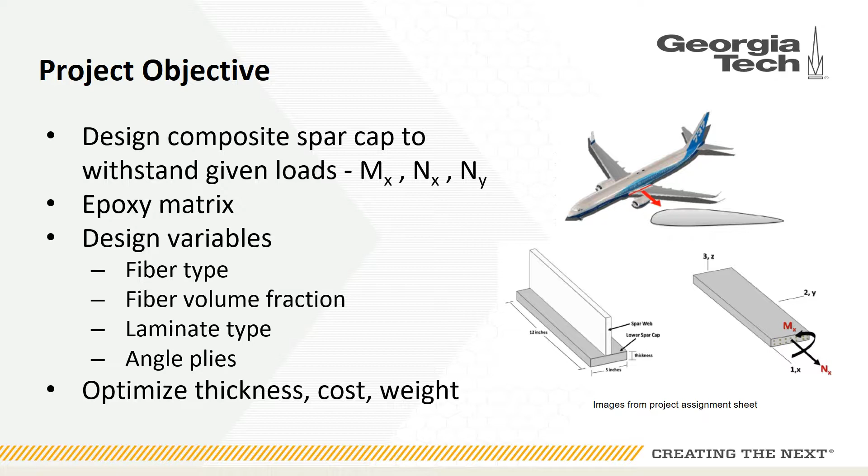Our fixed design variable as Team 4 was that we had to use an epoxy matrix, and our variables that we could change were the type of fiber, the fiber volume fraction, the laminate type, and the angle of each ply. And our goal was to optimize the thickness, cost, and weight. Throughout this presentation, we will talk about how we thought about the trade-offs between trying to get an optimal strength out of the composite part while also minimizing thickness, cost, and weight.

So for our initial conditions, we chose a TGDDM epoxy matrix. The reason for this was there was a lot of industry field testing and it had the most mechanical data available. For the fiber type, we chose IM7 carbon fibers. We chose carbon fibers in general due to natural fibers being low strength and having high discontinuities. We did not choose boron or glass fibers due to their high weight because they have high compressive strengths. However, because we do not have any compressive forces, we did not need that.

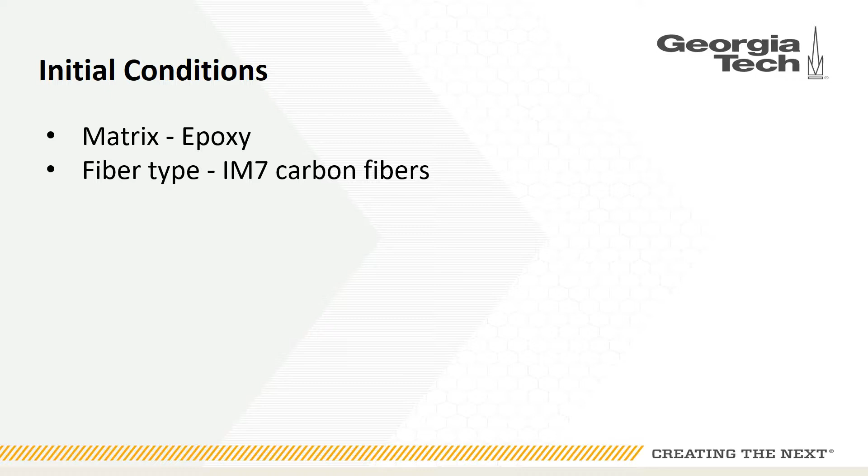And we chose carbon fibers over aramid fibers. Even though aramid fibers offered slightly higher strengths, their costs were exponentially more, so we decided to go with carbon fibers. As for IM7, we chose this because this was the most used carbon fiber in the aerospace industry, as well as having ample amount of testing. For the lamina type, we chose unidirectional continuous. This is because they are the strongest type of lamina, as opposed to unidirectional discontinuous and random.

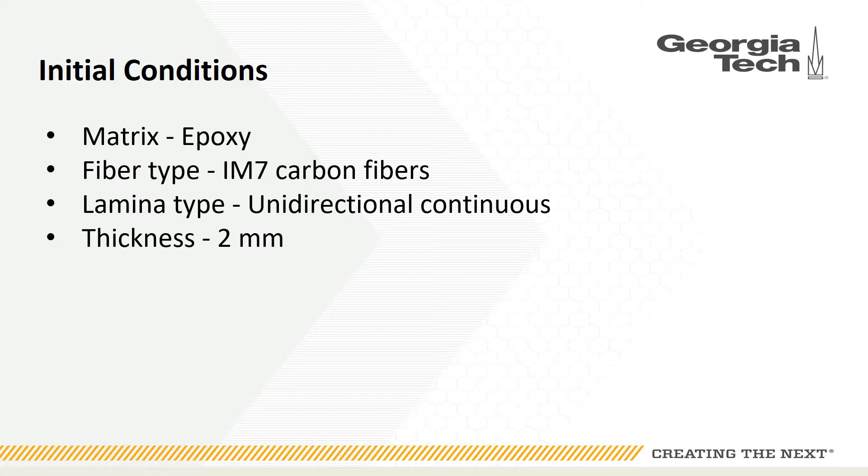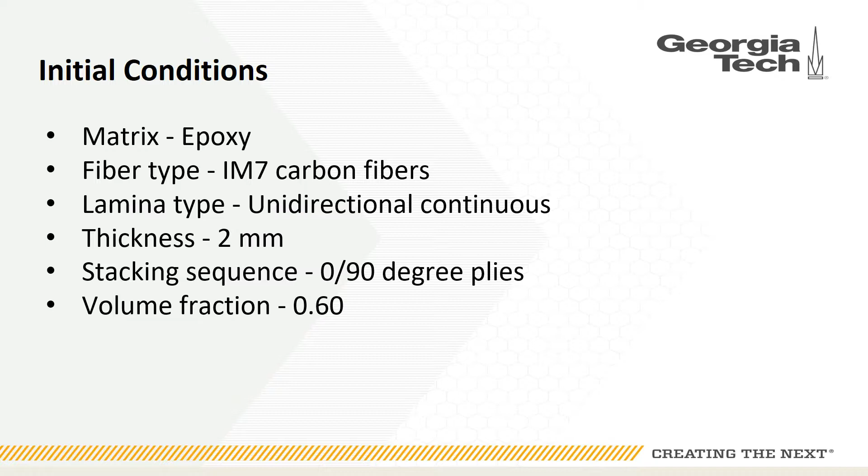For thickness, we wanted to consider that the thinner the lamina, the more in plane the stresses were, and this was one of our assumptions. Therefore, we tried to go as thin as we could without having to require too many plies. So therefore, we chose a standard thickness of 2 millimeters based off of prepregs available. For the stacking sequence, due to there not being any shear forces applied, we decided to only use plies in the 0 and 90 degree directions. And for our volume fraction, we started with 0.6 because this was what was commonly seen in the textbook and in the examples that we did in class.

For our analysis, we used the laminator software shown in the bottom left figure. By inputting our ply orientation and given loads, the software calculated the stresses and strains in the midplane of each lamina. For our failure criteria, we used the first ply failure method for both maximum stress and strain. This meant that at any time a single lamina had a stress or strain over the failure value, the entire laminate was considered to have failed. This is a very conservative method, but allows for us to have an extra safety factor automatically designed in, which is beneficial for aerospace use.

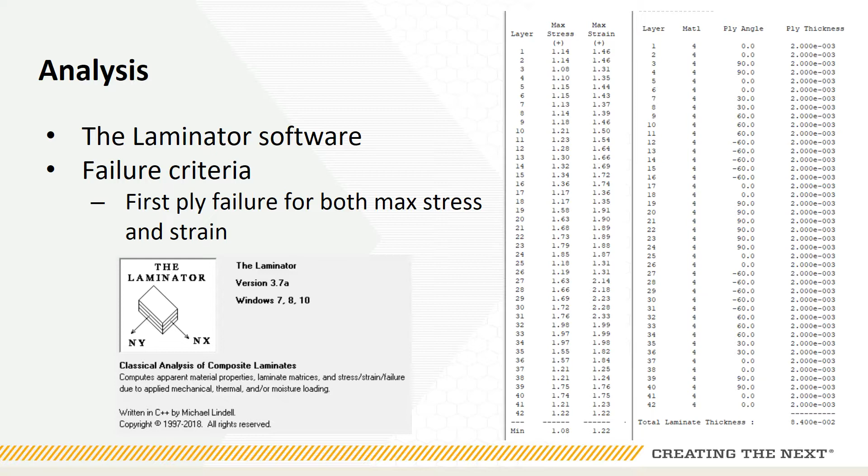An example of this analysis is shown on the right. The laminator software takes the stress and strain in each lamina and divides it by the max value. The numbers are then outputted as shown. If any value is below 1, that ply has failed, and therefore the entire laminate failed. As seen, the minimum value for stress and strain for this case is 1.08 and 1.22, so the laminate has passed.

When analyzing the stresses and strains of our initial laminate, it became apparent that each lamina was much closer to failing in the transverse direction than the longitudinal. In addition, the longitudinal loading on the laminas was less than half of their failure strength. To fix this issue, the team investigated the effect of changing the volume fraction of our laminas. The graph on the left shows the effect of changing the fiber volume fraction from 0.3 to 0.6 on the tensile strengths of each lamina. As shown, the longitudinal tensile strength increases as the fiber volume fraction increases, while the transverse tensile strength decreases. Therefore, it was beneficial to decrease the volume fraction.

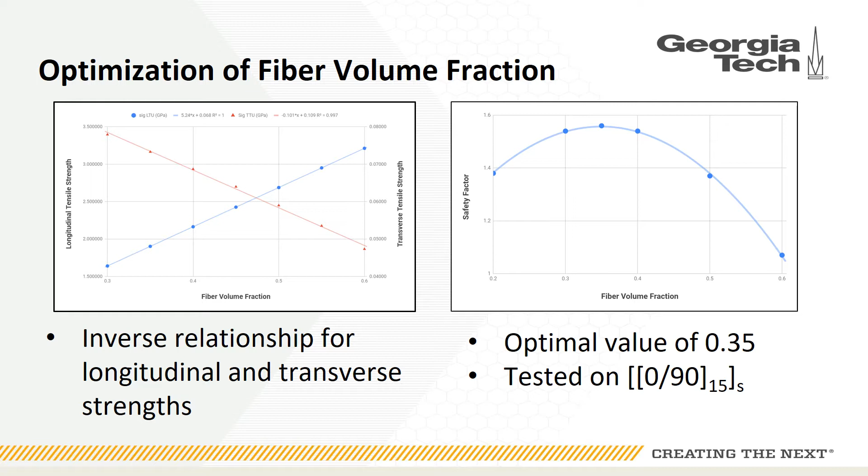For the exact value, the figure on the right shows a plot of the safety factor as a function of the fiber volume fraction. A higher safety factor corresponds to a laminate with higher strength. Therefore, a safety factor is a value that the team wanted to optimize, so fewer plies would be needed, resulting in overall lower thickness. A value of 0.35 for the fiber volume fraction gave the optimal safety factor, peaking at 1.56, and was therefore chosen as the value for VF.

After optimizing the fiber volume fraction, we began working on the progression of our ply orientation. First, we began with only 0 and 90 degree plies. However, even though we did not have shear forces, we found that it was beneficial to have 45, 60, and negative 60 degree plies included. We later started altering angles as we saw certain plies failing to help spread out the loading, and eventually we were able to remove multiple plies. This led us going from 60 plies in our first orientation to only 39 in the final.

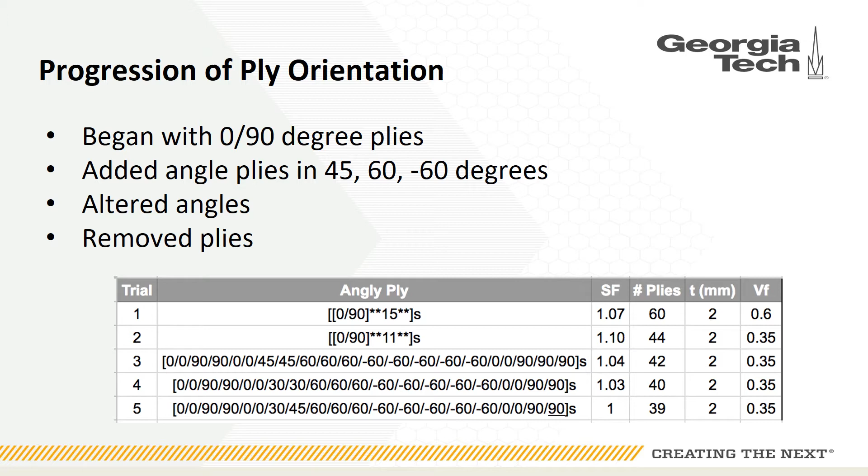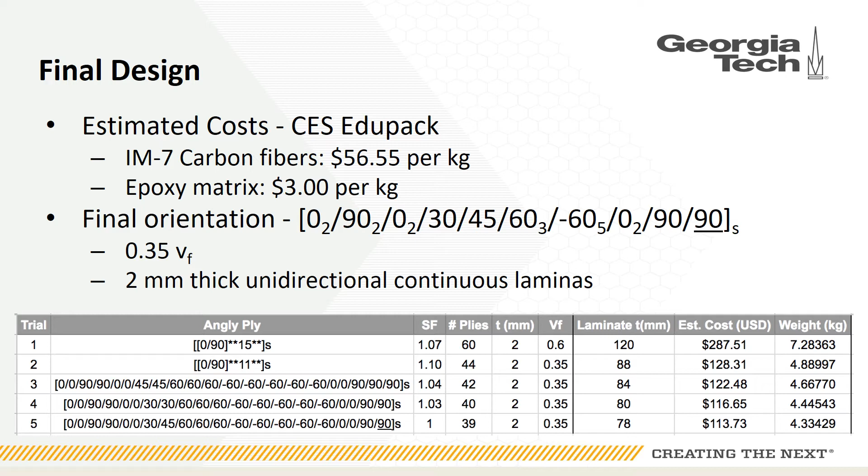For our final design, we found the estimated costs from CES EduPack. The IM7 carbon fibers cost $56.55 per kilogram, and the epoxy matrix cost $3 per kilogram. Using our final orientation with a 0.35 volume fraction and 2 millimeter thick unidirectional continuous laminas, we found our cost to have decreased from $287.51 to $113.73.

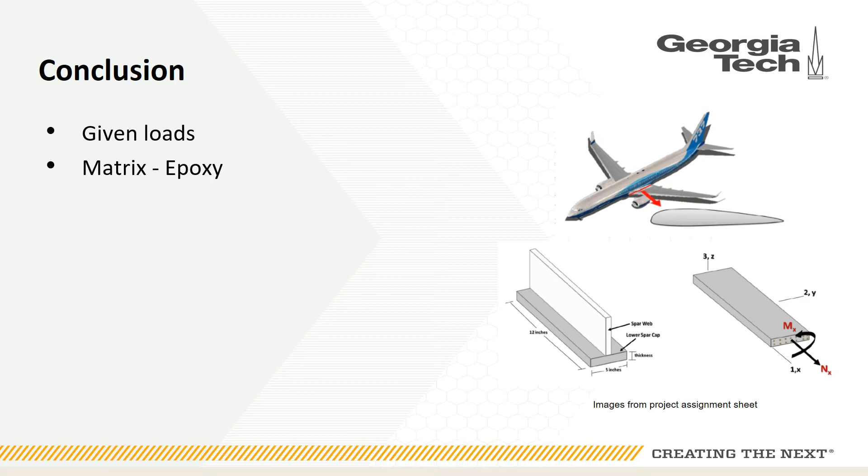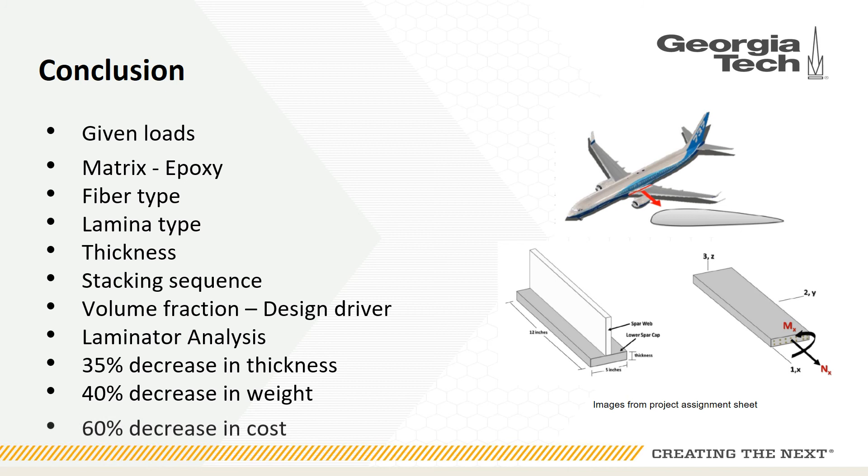In conclusion, given the loads for our composite spar cap, we discussed the epoxy used, the fiber type, the lamina type, the thickness, the stacking sequence, and we discovered that the volume fraction was the overall design driver. We used the laminator for all of our analysis and given outputs, and we were able to come up with a 35% decrease in thickness, a 40% decrease in weight, which led to an overall 60% decrease in cost.